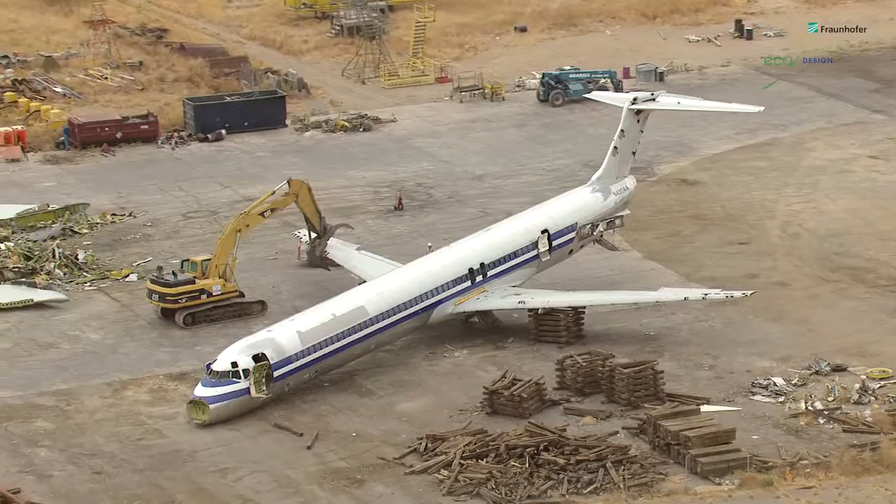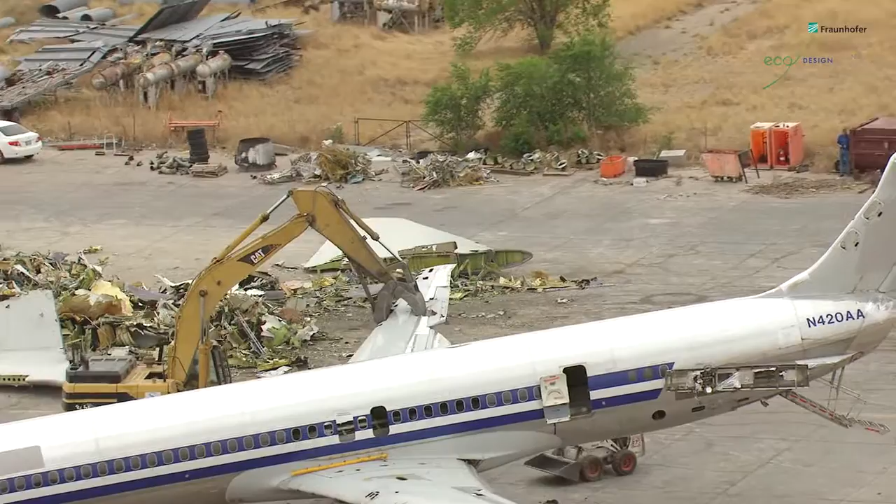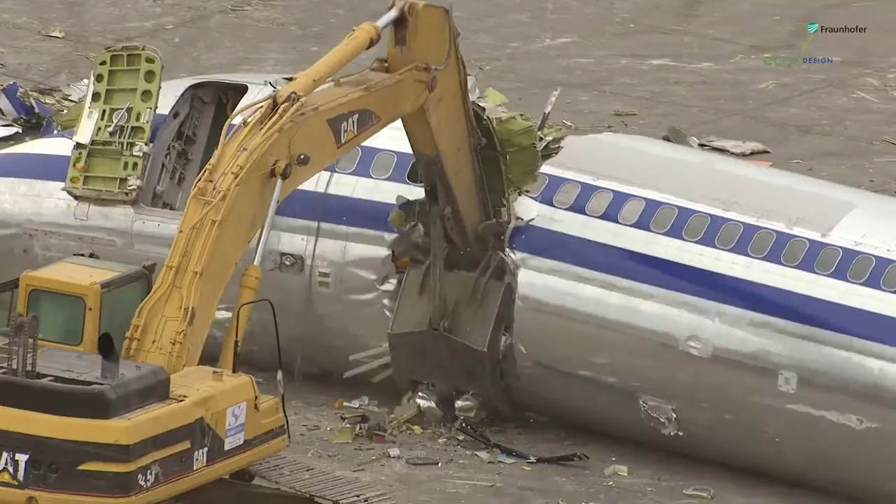An aeroplane is in service for 25 years on average, a generation. Scrapping that from today's point of view is simply a complete waste. Eco-design, in other words, sustainable, ecological, social and economic use of all the aircraft life resources, is one of the cornerstones of the Clean Sky Initiative. Eco-design demands a recycling scheme in accordance with modern end-of-life management.

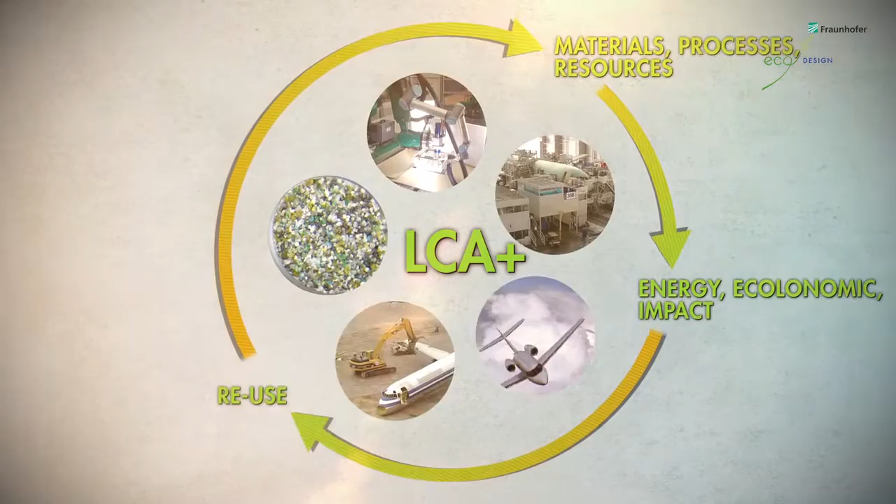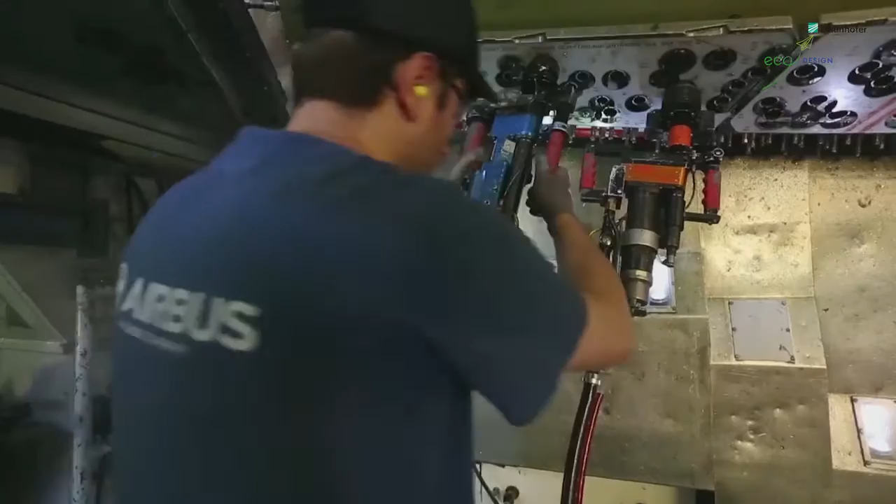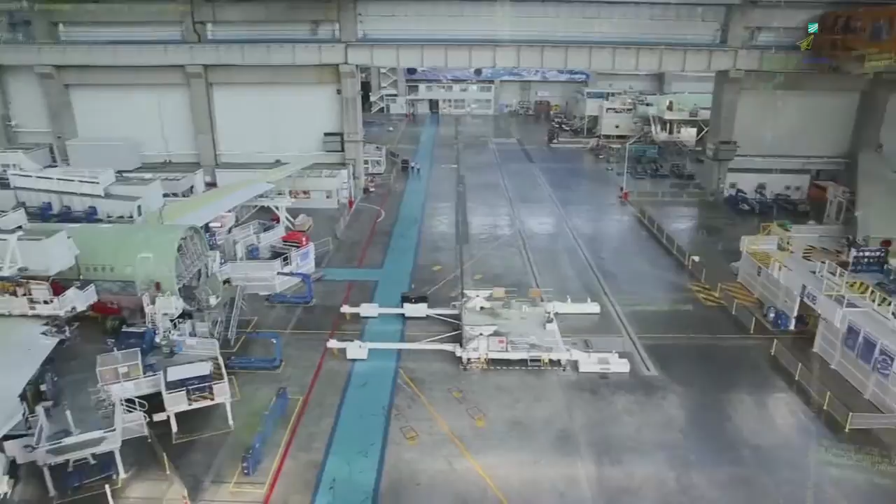For greener aviation parts, new materials and advanced processes are consolidated into life cycle inventories. These are the genes of greener manufacturing excellence as well as higher and more efficient production levels. The re-use strategy, maintenance and green repair are essential for extra long life structures and onboard systems efficiency. To this end, via Eco-Design, a unique materials database has been developed and implemented in cooperation with all the relevant stakeholders in the industry.

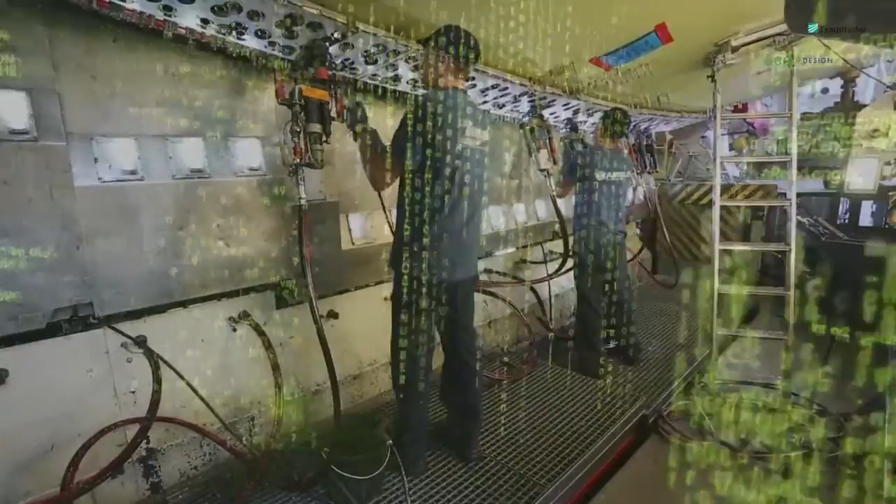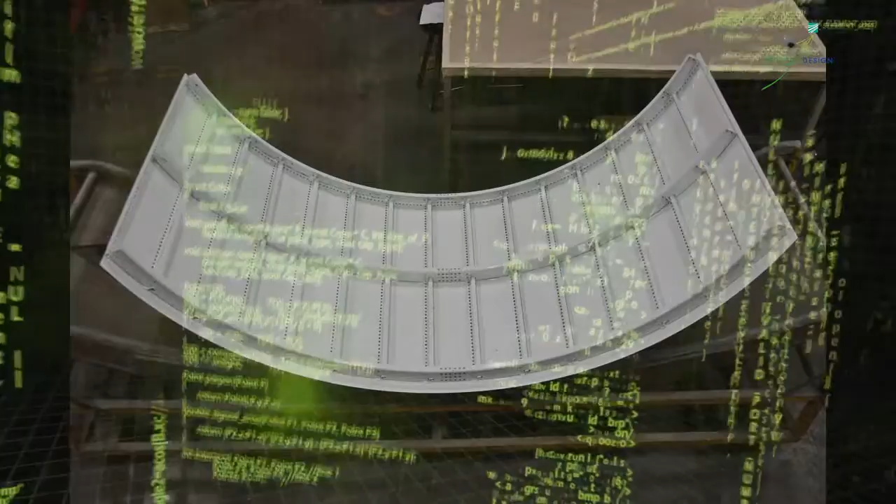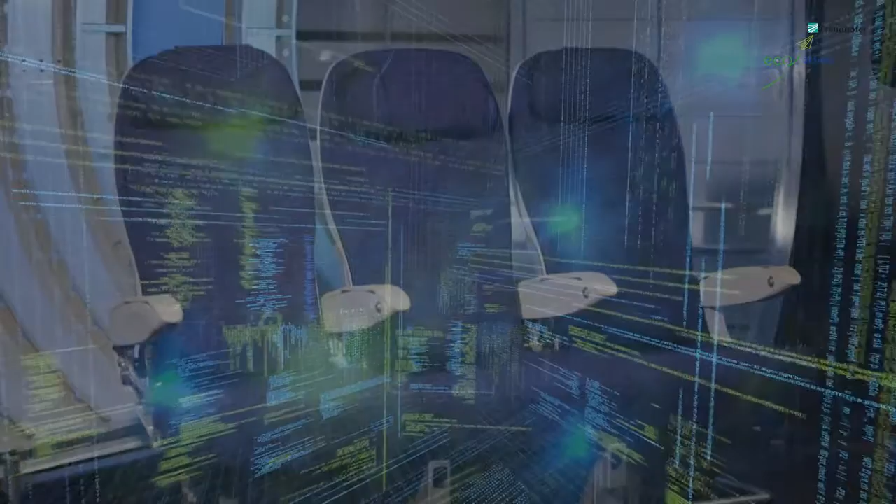The developed and integrated life cycle analysis guidance tools had to abridge the expert ISO standard for life cycle assessment on the one hand. Now life cycle assessment is easier to perform. On the other hand, these guidance tools allow an assessment of the strengths and weaknesses of the industrialization scope of products and processes. This, in turn, is all summarized in formal eco-statements.

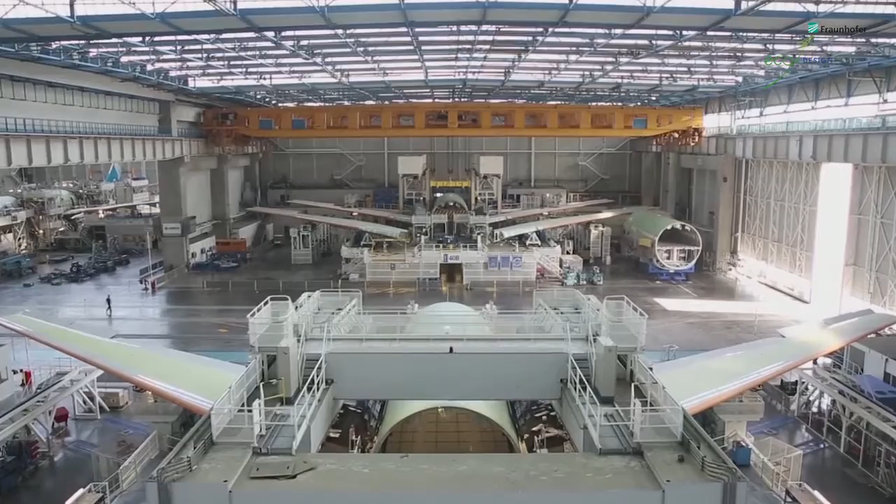The future for eco-design is that the aviation industry has already started to incorporate and consider the environmental criteria in their decision-making of future aircraft design, by using these tools, the LCA tool, the eco-design tool and the database, and also the results and all the knowledge and experience gained with Clean Sky One.

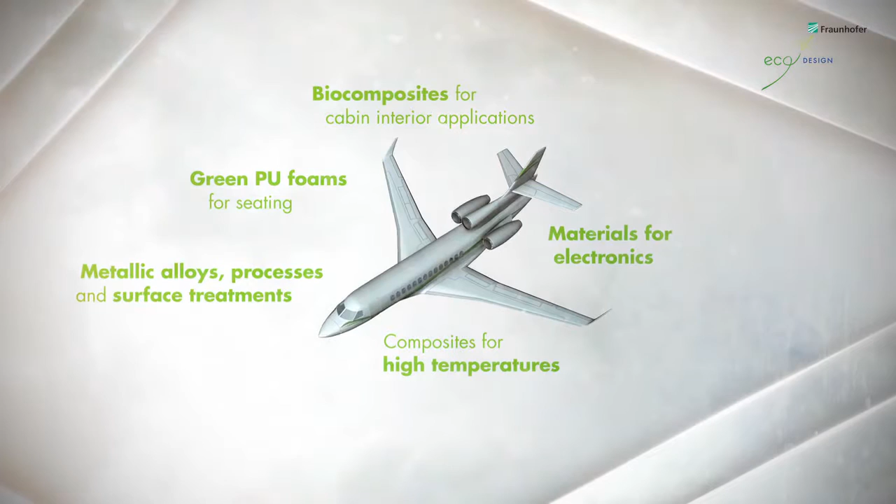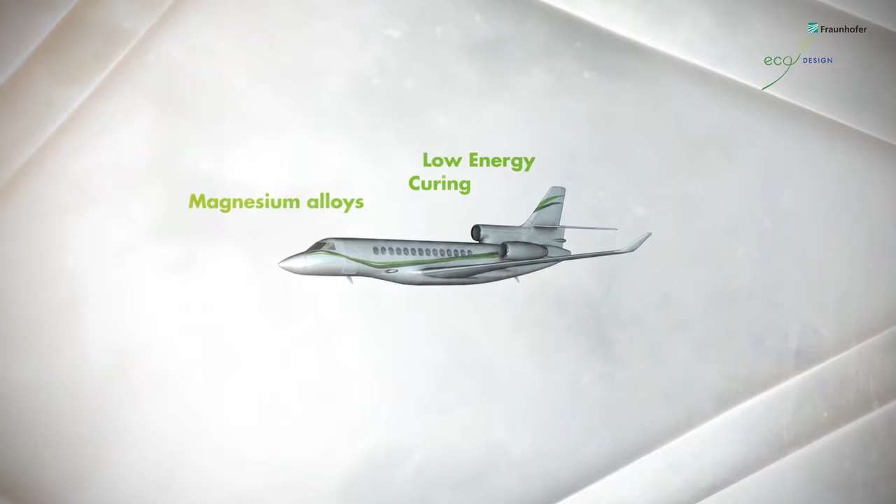The eco-design partners have worked on many other technologies. In eco-design for airframe and in eco-design for systems, they have developed innovative materials and processes to increase sustainability along the whole production chain, from the emergence of an aircraft in the planning process via the development of new components and benchmarking of the technology's pathway before they are incorporated into the finished product. Reducing the economic and ecological payload, increasing the user benefit.

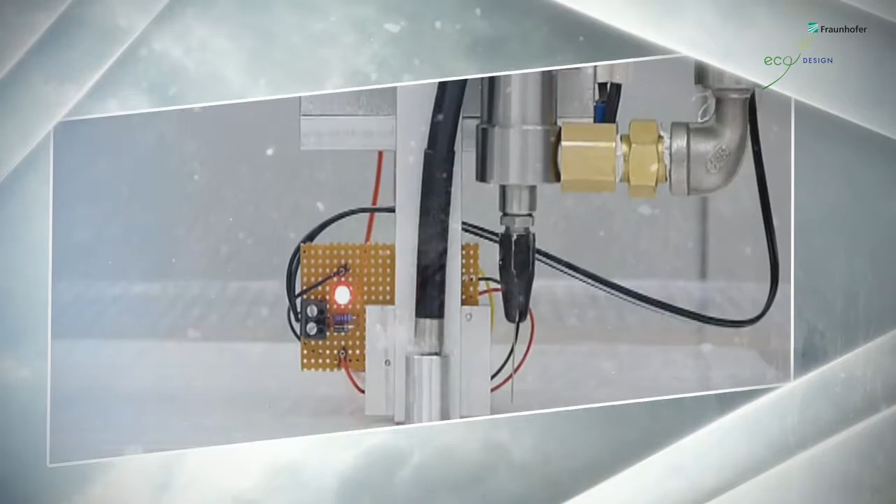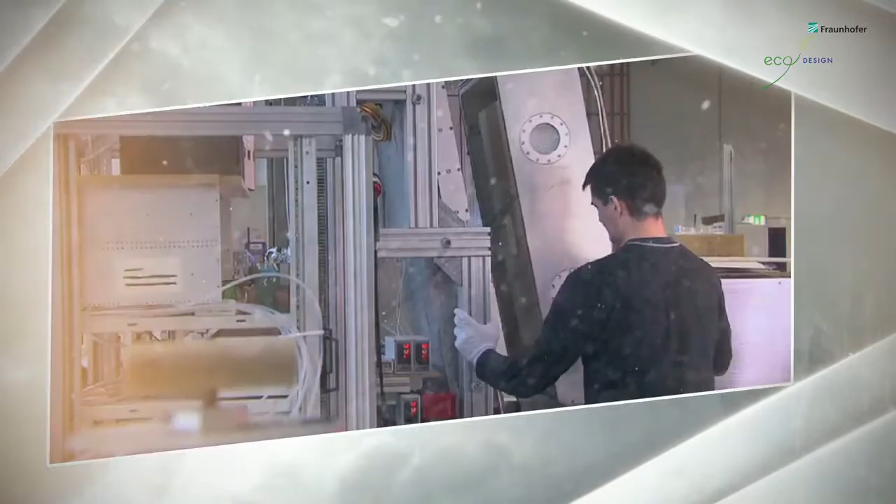The numerous technologies include chemical stitching. This is one of many joining techniques for composites which could be used in the future to safely join different materials. It facilitates and improves the manufacture of lightweight elements, particularly in the carbon fiber sector.

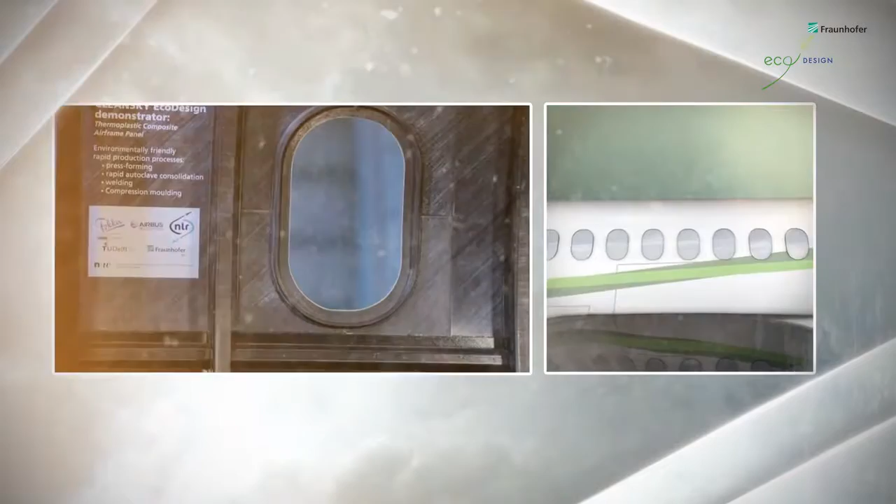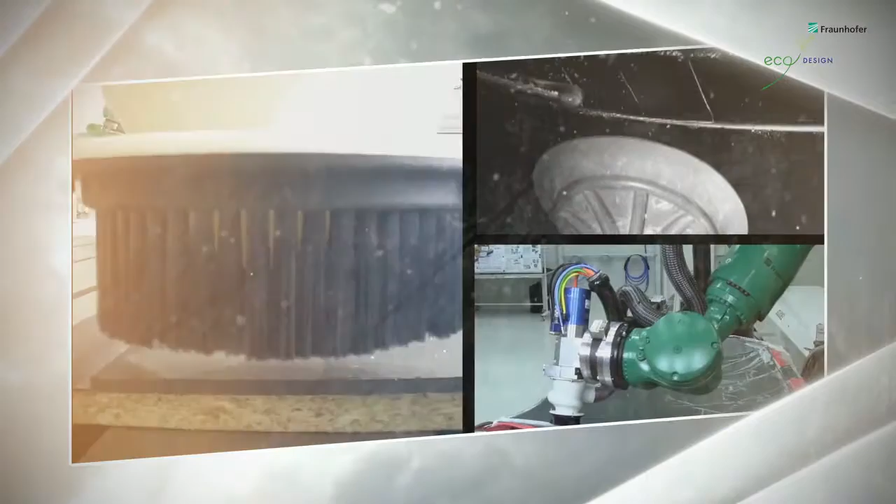The eco-design partners have come up with more than 100 ideas and innovations to date. For a whole series of them, there are now demonstrators to present a validation stage before they go into industrial production. The goal now and in the future is a reduction of the buy-to-fly scrap ratio. This can only succeed by raising the quality of the materials and the use of alternative machining methods in the automation process.

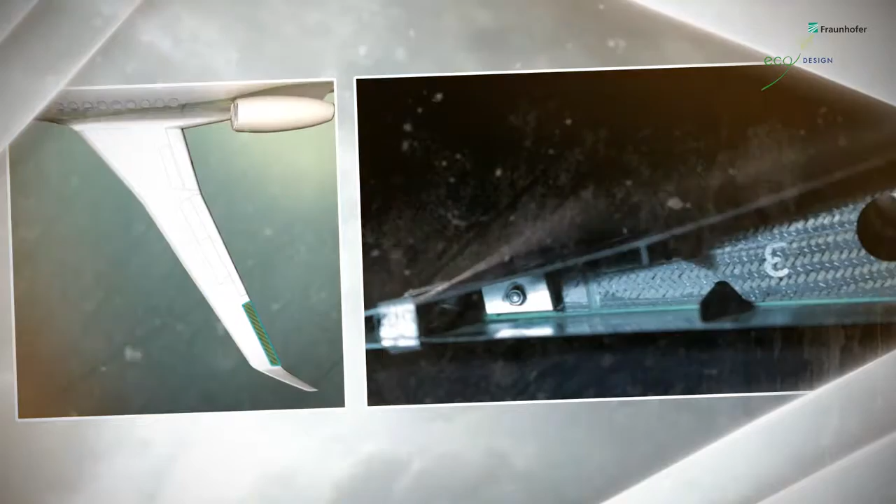This alternative control surface is extremely light but still robust under flying conditions. At the same time, it is not too expensive to produce. This is also true of this carbon fiber structure. Work has been done to improve its form and the efficiency of its production process. By replacing heavy structures by lighter ones, even more fuel is saved, and as a result, their CO2 emissions are reduced.

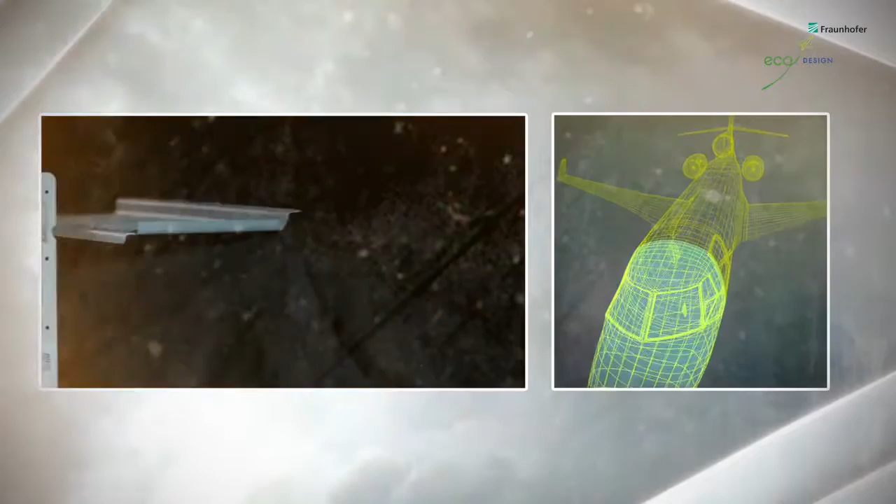The foam used in these seats derives from recycled polyurethane on a biological basis made from renewable raw materials. It is also highly flame resistant. Refinements have also been carried out on the electrics, a set of new corrosion-resistant plugs whose manufacture is now environmentally friendly. Component made of magnesium, attractive to look at, thin and hence lightweight, but at the same time recyclable. This is also true of the new components made of thermoplastics.

We have been trying to replace some machined metallic parts. Here I've got a turbine scroll made of thermoplastic reinforced with carbon fiber, and this part is done by injection molding. It was done in the frame of a call for proposal, whose leader was Egmont Plastic, an SME, and this part, as you see, is very complex, but was done in one shot by injection molding.

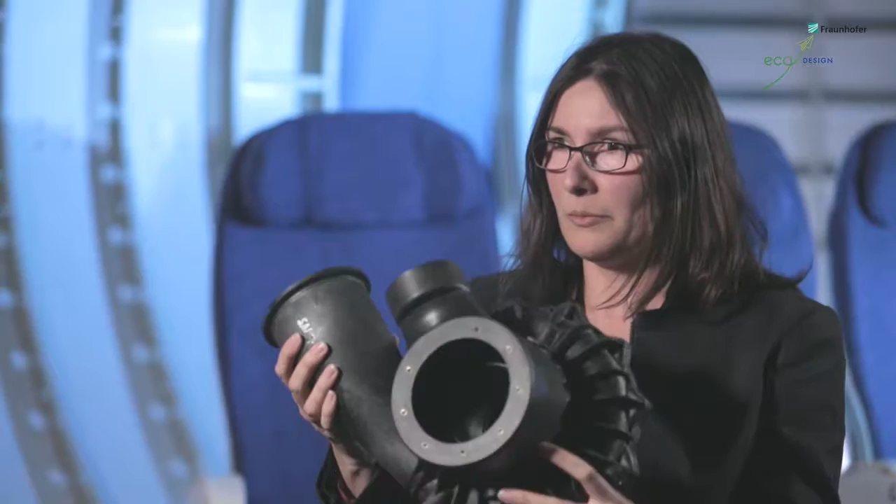And this is a big achievement for us because we are replacing a metallic part by a composite part, which is much lighter. A lighter part means reducing fuel consumption during the operation phase. And during manufacturing, it means that this part is done in one shot, reducing the cost and the energy consumption.

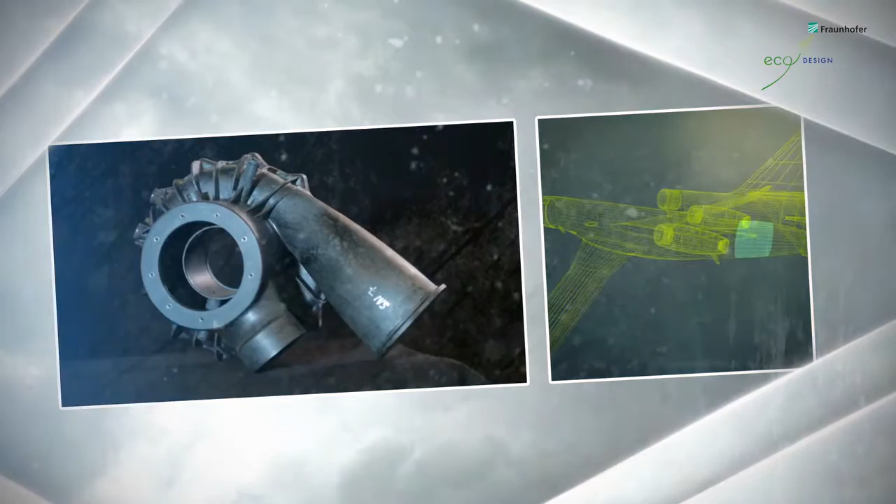Thermoplastics can be melted down, allowing them to be put back into the material cycle. Another challenge, the elimination of toxic substances from the various materials. Safety standards in the aerospace industry are extremely high. Since there has been no adequate substitute until now, anti-corrosion coatings contain chromates and cadmium. Both are poisonous and consequently need to be replaced by alternative technologies.

So the eco-design scientists have been searching for alternatives, and as far as chromates are concerned, they found an answer. They're now pushing ahead with the development of advanced alternative processes. One main achievement is working towards the removing of chromates, those hazardous substances which we definitely need to get rid of. So this is one main example, but we have also other environmental aspects to deal with,

not only hazardous substances, but also reducing the energy consumption, reducing the CO2 emissions, improving recycling possibilities, especially for composites and so on. Eco-design, to me, is something which is very important for the future, because it's a driver for improving the products at the end, and the future would be to have this culture, the eco-design culture, embedded in all designers' way of working, so that they can achieve the benefit for environment when they design new parts.

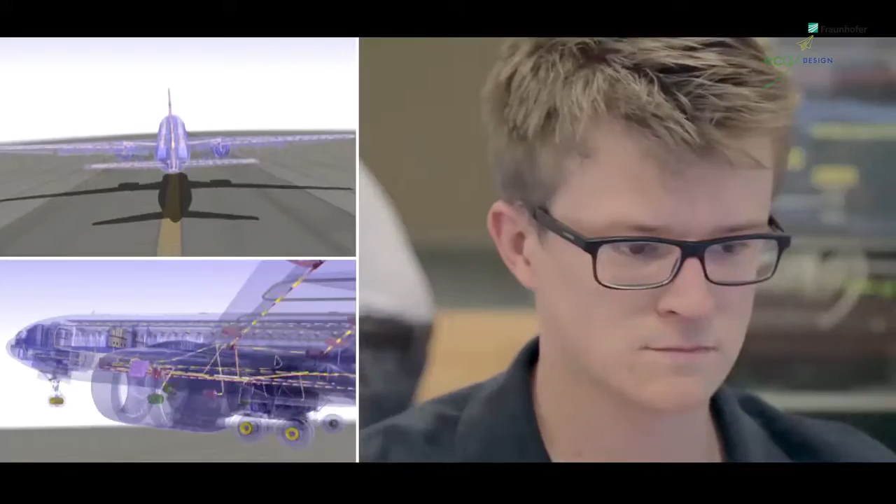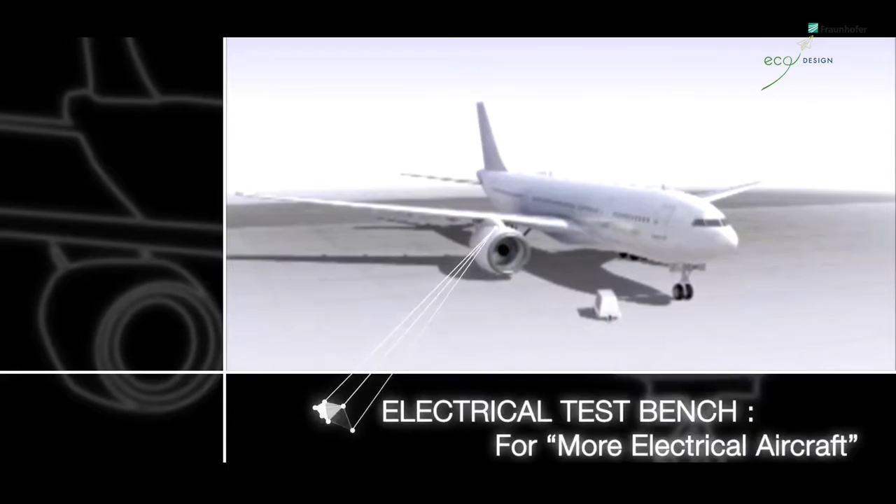Aircraft of the future could be all electric. In other words, all their moving parts could be electrically driven. The intention is therefore to steadily replace the oil-based hydraulic systems in aircraft. In the Copperbird, an electrical test bench, the engineers can test the electric innovations under real conditions.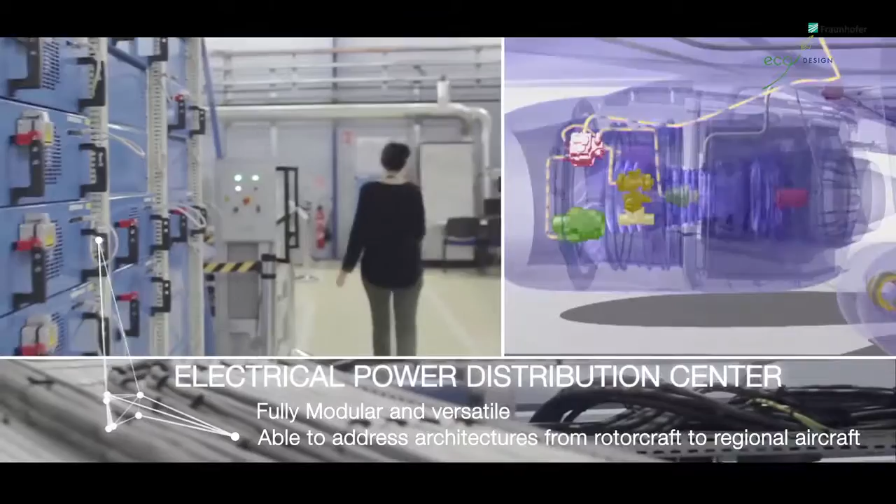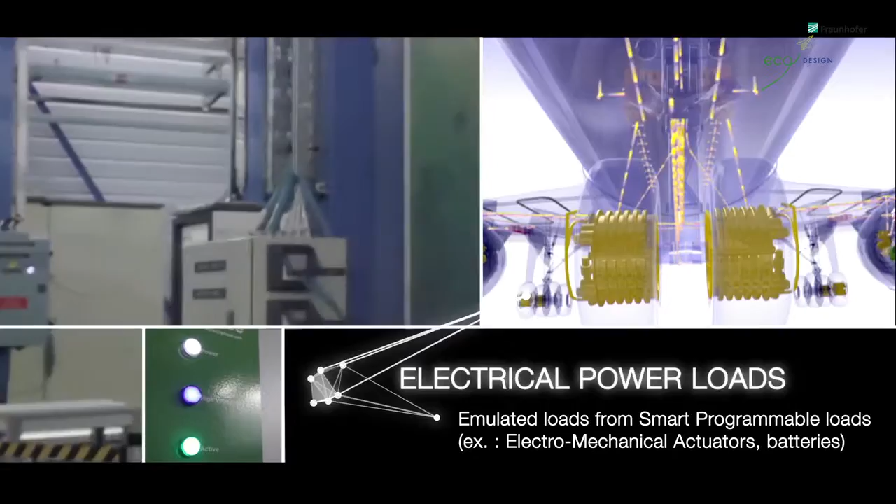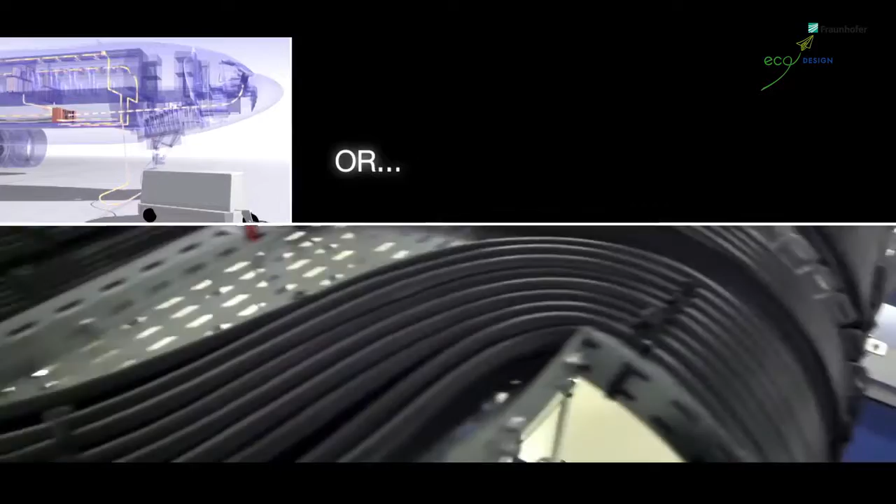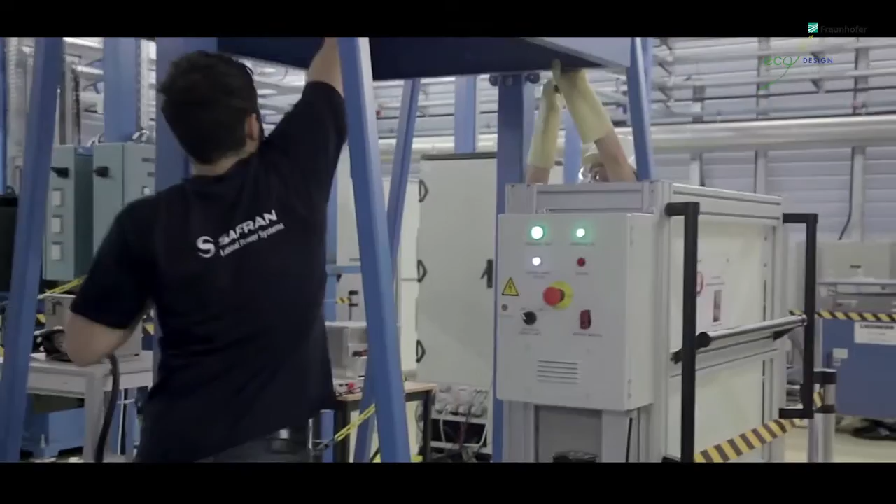The test facility simulates the onboard network architecture. They show whether the new electric drives can be integrated into the relevant system, where adjustments have to be made, and how robust the electronics are, both in normal operation and in emergencies. The question is, what challenges have to be overcome if aircraft are increasingly to be operated exclusively via electric circuits and servo motors? The simulators can be individually set to any given aircraft type.

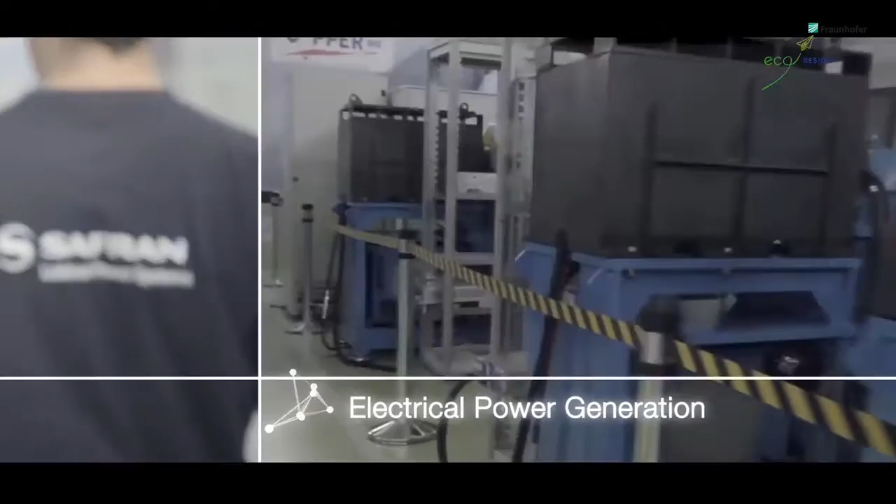The Copperbird thus reduces the number of expensive flight tests and at the same time reduces damage to the environment. For the aviation industry, it opens up the way to the green aeroplane. We faced a lot of challenges in eco-design, but I think that some of the most important challenges were to provide some new technologies which perform equal or better to the conventional one, but mainly those new technologies could improve the environmental impact and perform recyclability.

We have many things to cover yet. We have to further mature the technologies already developed, to apply them on more complex demonstrators, more similar to real parts, and to perform ground and flight testing, long life stability testing like natural exposure testing.

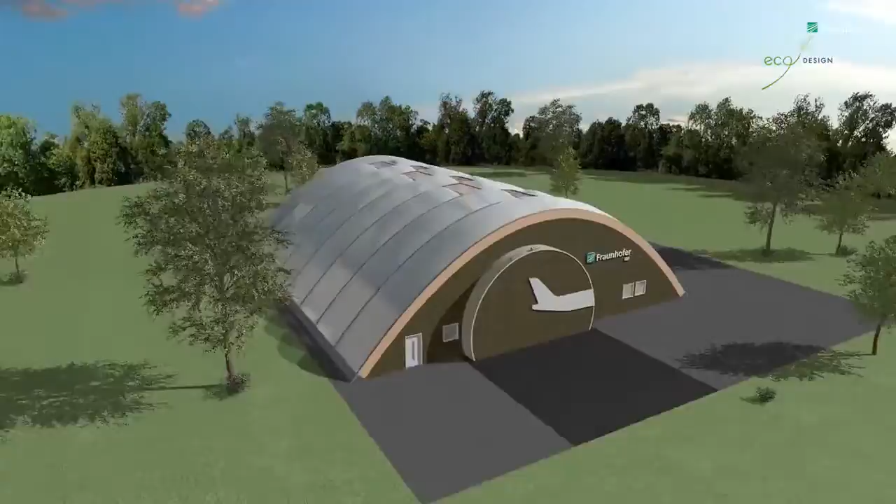Safety is paramount in aviation. Electrical components reduce weight and thus save fuel, but they also generate a lot of heat. Alongside the question of the effects of high voltages and compact units in the electric systems, the total concept of eco-design focuses on a further important aspect. In the nature of things, this means heat and energy management.

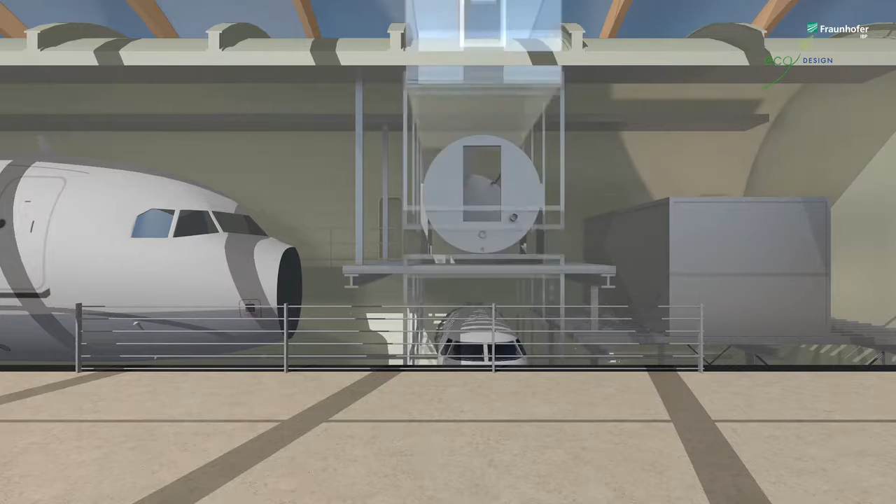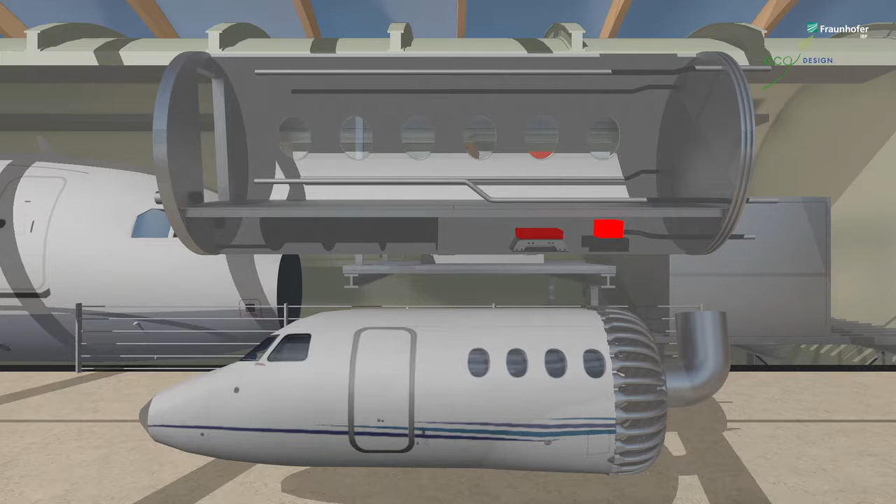On the thermal test bench, the fuselage of an aeroplane is observed in three partial configurations: cockpit, cabin, and tail. The test facility simulates the climatic conditions in the interior and exterior of the aircraft on the ground, in the air, and in failure cases. For example, an extreme loss of cabin pressure, also known as rapid decompression.

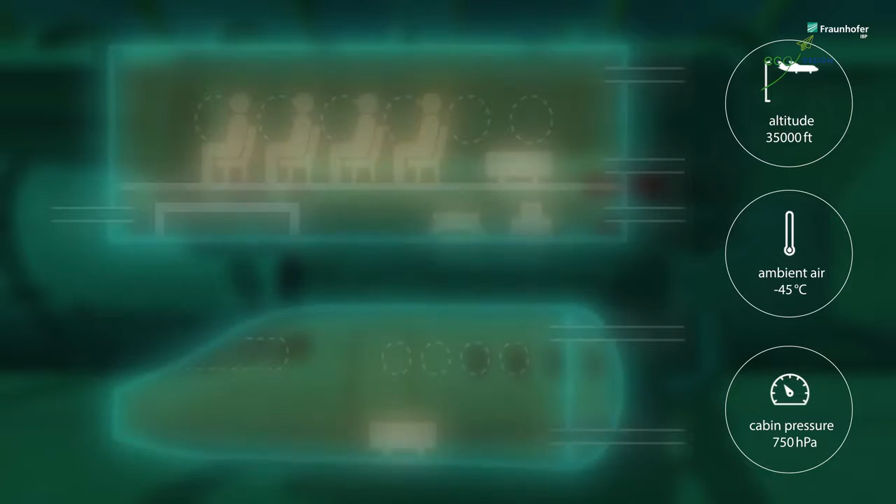Thanks to the thermal test bench constructed as part of eco-design, the scientists are able to precisely examine components, materials, and future modular equipment in real scale. The technical readiness level of equipment used in aviation can thus be safely validated on the ground. This lab is unique in the world. It has a number of sophisticated cooling systems, heat exchangers, simulation chambers, and a calorimeter.

So the greatest achievements were to develop these technologies to a certain maturity level, then to manufacture 40 parts, which was quite a large amount of parts, and then to perform eco statements, so life cycle assessment analysis, to quantify the benefit brought by the new technologies compared to the current technologies. So it was a great achievement of this project.

So in the future, we have to continue developing technologies for the production, for green production of our aircraft. And also we have to keep going in the use phase, because the use phase is the most impacting phase. So it's our work since 100 years at Dassault Aviation to reduce the drag, to improve the aerodynamics of the aircraft, to reduce the weight. But we have to continue to work on this area in order to reduce the burden.